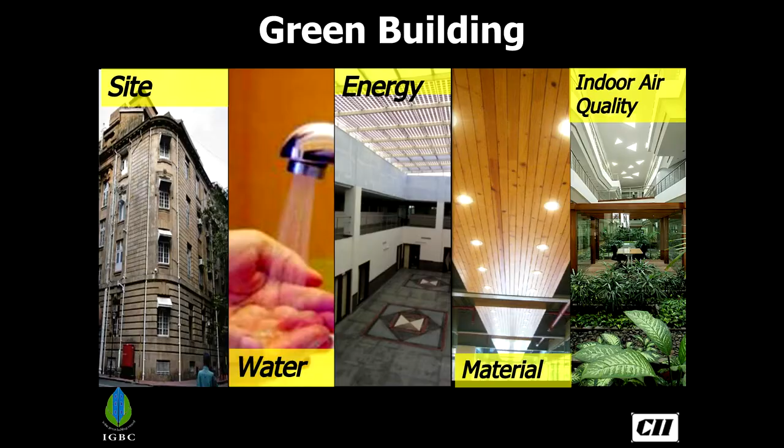So like the 5 fingers in our palm, the green building movement has given architects and every individual sitting in this room and watching this presentation a beautiful opportunity for an integrated design and a holistic approach. Like the 5 fingers in our palm, we have to address the site-related concerns, water, energy, materials, and indoor environmental quality. So the moment we started the journey in 2001, it was very revealing for us.

Our own great-great-grandfathers, thousands and thousands of years ago, discovered the significance of the 5 elements I mentioned a minute ago. However modern we are today, we may be using an iPad and waiting for the iPhone 8 to come. But nevertheless, we in India, before starting any activity, spiritually worship these 5 elements, what we call earth, water, fire, air, and sky. So green buildings are not new to India.

So having set the tone, let us share some of the ideas we have implemented across the country in many projects in India. So to start with, to have a house or an office, we need a site, correct? So how sustainable is our site going to be? The number one green idea here is that green buildings are designed and built around the environment, not against it. For example, the moment you get a site, it may have flora and fauna or a well-grown tree. In a conventional building, many times we don't care about these resources.

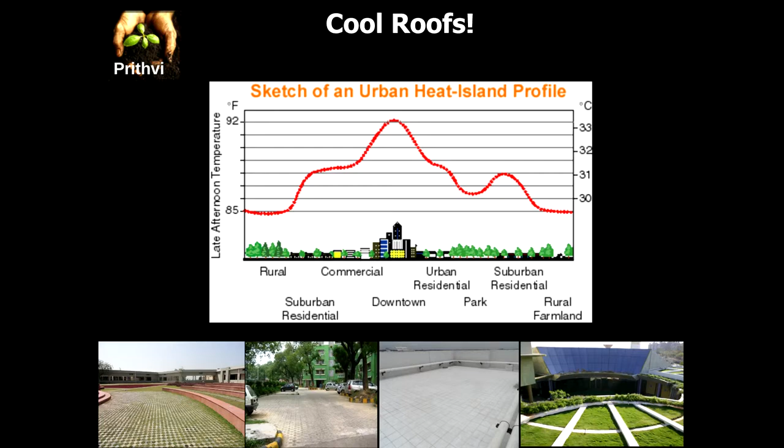Here are all the green ideas. Instead of having conventional concrete or tar around all our colonies or our buildings, you can go in for open grid pavers, which you are able to see on the extreme left hand side of my slide. These open grid pavers have greenery in between them. Or even if you are not able to do that, the roads and the pathways can be covered with beautiful trees, which give a beautiful canopy. Choose the plants which are native to our climatic conditions so that they can shade the buildings and the built environment below. And even the roof, the topmost roof surface is the one which is exposed to the worst ambient conditions outside during the summer months.

So here is a very unique paint, what we call a high albedo paint, which has been painted on the roof surface, so that it doesn't allow the heat to come into my building, so that I need not have any air conditioner at all. In some of the buildings, even the topmost roof has been covered with greenery, so that this mitigates the temperature rise in my microclimate.

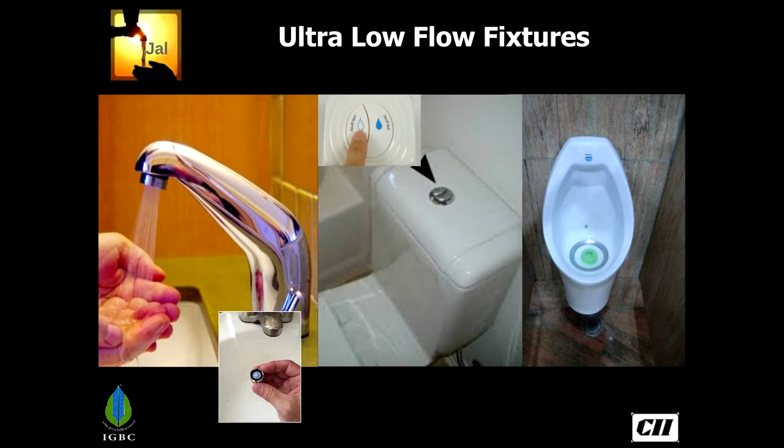Next to the beauty is water-free fixtures. This is in our own center in Hyderabad. We installed it way back in 2002, and still it is working effectively. It doesn't even have a plumbing line, doesn't require water at all to take away the entire urine. So by going for ultra low flow fixtures, we are able to save almost 40 to 50% reduction in water consumption.

Here is a beautiful classical idea. When we said we wanted to save energy in one of the green homes, they preserved the entire rainwater. Instead of letting the rainwater go elsewhere, this green enthusiast stored the rainwater in the sump below the living room. So we were exploring how do we lift the water from the sump below to the surface. Conventionally people would have put a motor, correct? Whereas here is a man, he has put a hand pump.

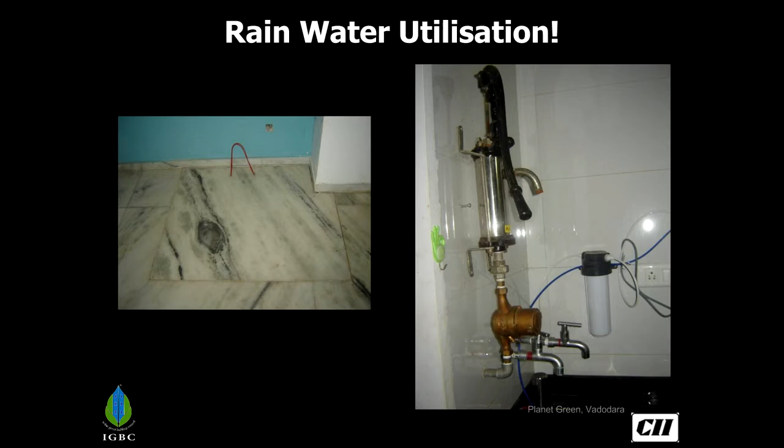So he was going for a gym earlier. Now he doesn't go to the gym. When he was asked why, instead of going and lifting a weight in a gym alongside strangers, here is a guy who comes to the kitchen every single day, does the same weightlifting standing next to his spouse. So the bonding has also improved. The happiness index in the family has gone a notch up. So this is a cool idea, and it is not in one house, many houses are doing this.

Next element to save water is a beautiful idea. If you ask me how much water I have consumed in the hotel room to take a shave and a shower today morning, I don't have an answer. Because since I paid 5,000 rupees as a hotel rent for a night, I switch on the shower and then I become a bathroom singer, correct? I keep on singing, the shower is on and on and on. I don't know how much water I consume for taking a shower in the morning.

Whereas if you ask me how much petrol I have put into my bike or car today morning, I know to the last decimal. Because I see the meter every time when I'm paying 100 rupees. So I ensure that I get 100 rupees worth of petrol or diesel.

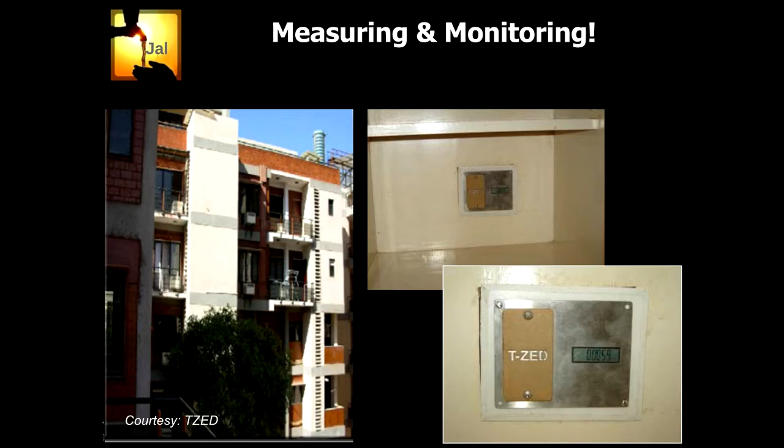So here is another cool idea wherein the water flow meters are located at the entrance of every washroom in this green apartment. Can you believe it? Before I go to take a shower, I see the meter reading is 100. When I come back after doing all the stuff inside the washroom, if it reads 200, how much have I consumed? 100 liters.

So by having a simple measurement, that is what we say in the old Indian proverb: what is being measured can be managed, what is being measured very well can be managed very well. By simply measuring and monitoring, this green apartment is able to reduce water consumption by 50%. On a lighter side, we call this number the bathroom singing index.

When we generate enormous amounts of waste water in our house, office and elsewhere, how do I treat it? The conventional idea is to use a sewage treatment plant which uses enormous amounts of chemicals and power, whereas here is a natural way of treating it. The natural sewage treatment plant, we call it phytoremediation.

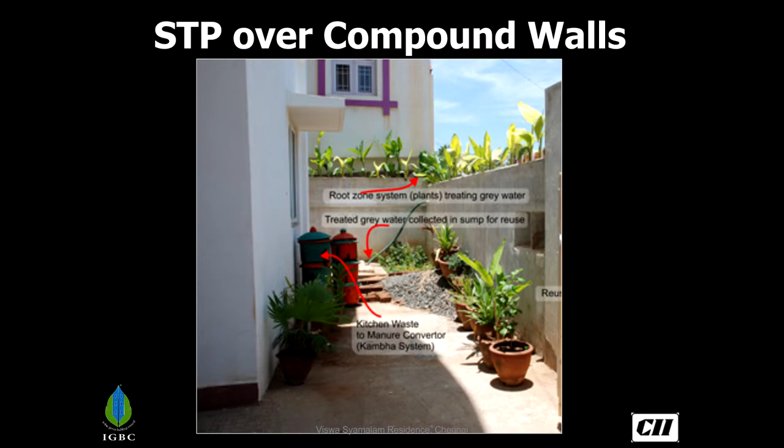Somebody may still say that I don't have that much space. Here is another cool idea. In this house, a green home certified by us, they have used the compound wall as a sewage treatment plant. Can you believe it? Except for the urinal and WC water, the entire water generated in the kitchen sink and washing machines gets treated on the compound wall of this green home.

So that is on the water. Next is on energy. Here you are able to bring in contemporary change in the way in which the buildings and building materials are used. In fact, we would love to say that the entire market is being transformed. You are able to bring in more and more newer products.

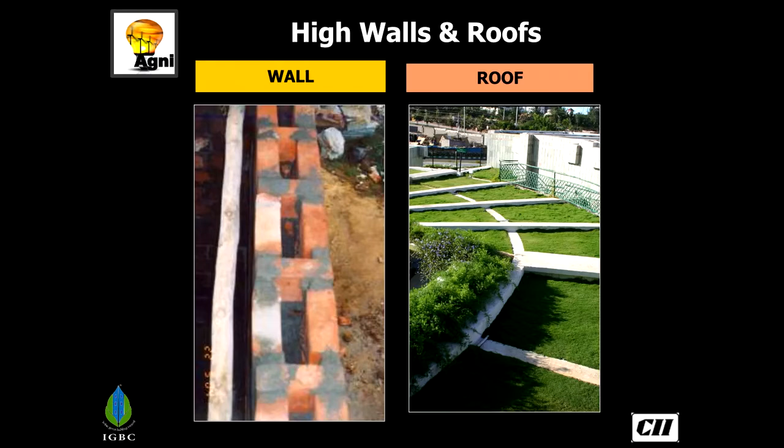For example, here is a beautiful wall made out of two layers with air in between. It is done in a small house in a village. Can you believe it? Based on this success story, many buildings across the country have adopted it. Having a green roof reduces the energy demand substantially. Isn't that another cool idea?

When water, oil, or gas can travel in a pipe, why not sunlight? Then came the sun pipes. This is a small pipe which carries sunlight through a highly reflective medium inside. After multiple reflections, it becomes like a beautiful light. If I hadn't told you, looking at this picture, it looks like an artificial light glowing, correct?

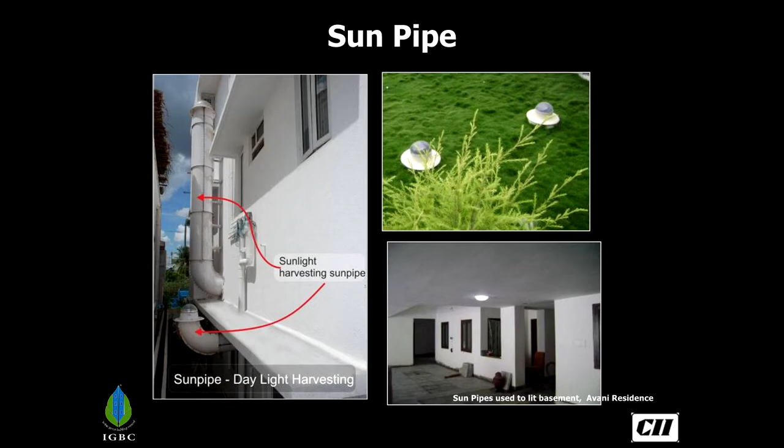But it's not actually an artificial light. It is natural sunlight brought in deep inside my house and my office, so that we can completely avoid artificial light during the daytime.

Here is another case: the hot water generated in this office is used for cooling. Can you believe it? Heating is used for cooling in these office spaces using vapor absorption machines.

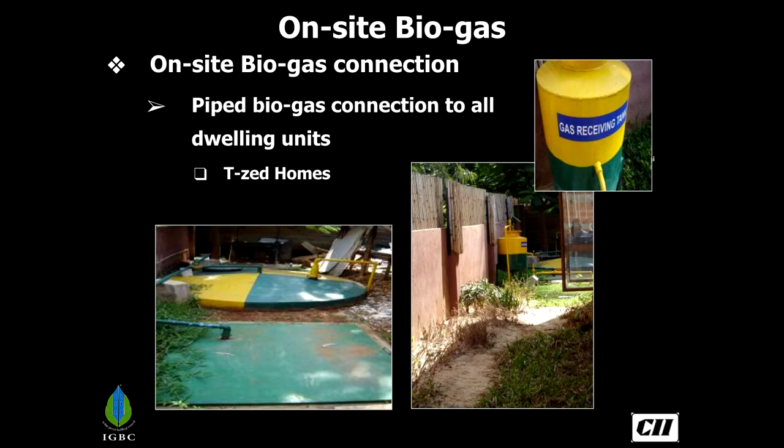Here is another classical example of how we can segregate organic waste in a kitchen in a big residential complex, and then it's able to generate biogas and come back to my own kitchen through a piped connection. Many Indian houses with this facility are able to replace two conventional fossil fuel based cylinders in a year. So what we consider as waste in the kitchen comes back to me as a resource in the form of gas. Next is on materials.

There is nothing called waste in nature. Here is a beautiful green building wherein they have taken old railway sleepers. Earlier, railway sleepers were all made out of teak wood. 150-year-old teak woods are taken from an auction, and then it becomes a building envelope. They didn't stop there.

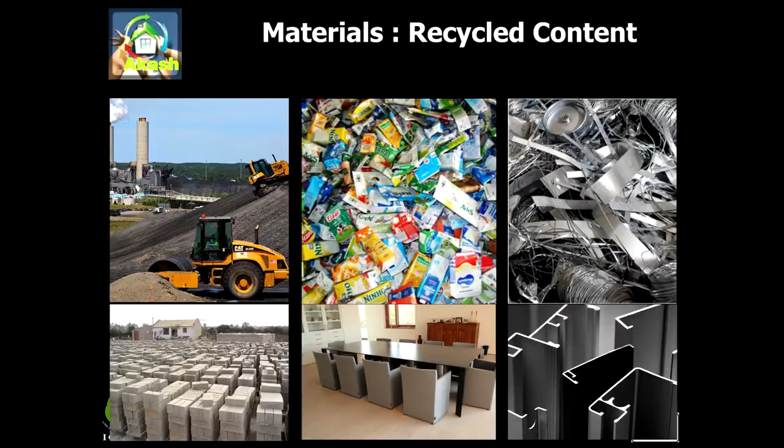The packaging wood you get with machineries, a beautiful pine wood used as packaging material, has been converted into modular furniture and a false ceiling. So every industrial byproduct or waste material, there is somebody else who sees that as a resource. Fly ash from a power plant can be converted into cement or a block. A consumer waste product like a PET bottle or a Tetra Pak can be converted into a tabletop. So there are many options available.

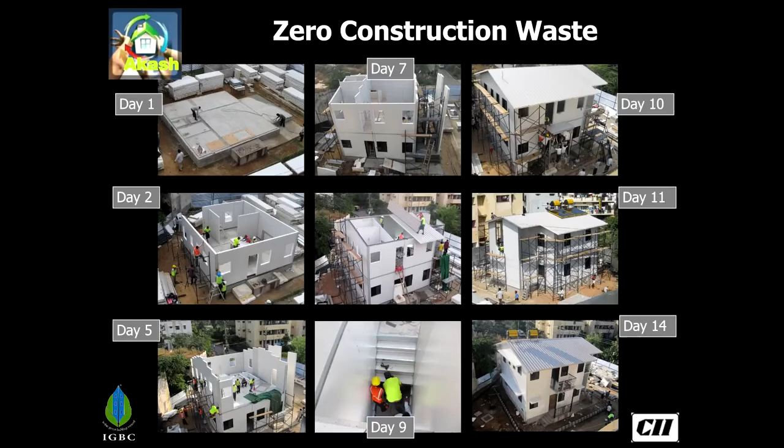This building has not even generated 1 milligram of construction waste. Handling construction waste across the world is a very, very tough, challenging job. Here is a case wherein they did not even generate 1 milligram of waste while constructing this house, and they did it in 14 days by using a prefabricated assembly. It's all assembled — the entire house is assembled at the site.

The last one is on indoor environmental quality. Many of us would have experienced this: you walk into a cinema hall to watch a movie.

After the end of the movie, you pick up some kind of a headache or uneasiness, correct? Many a times we blame the quality of the movie, correct? You have chosen one of the lousiest movies ever produced on earth - may not be the reason. There won't be any fresh air. If there is no fresh air available in that hall, that could be one of the reasons.

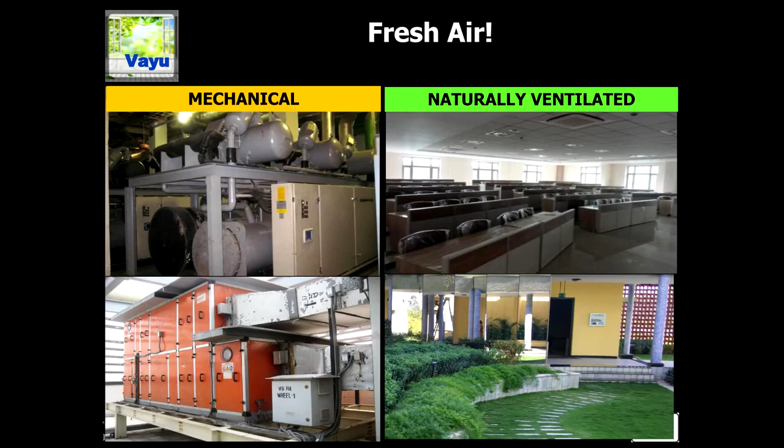So green buildings encourage bringing in more and more fresh air. The green buildings are not only encouraging energy-friendly techniques, environment-friendly techniques, it also encourages people-friendly techniques like all the finishing products - your paint, adhesives, the furnitures, the plywoods - all of them should go green. There are options available.

And then daylight and views is being encouraged. So when you walk into an office or a home, it should be completely flooded with daylight.

Ironically, there was a medical journal article which we read very recently - some of the Indians are having a deficiency in vitamin D. Can you believe it? What is the source for vitamin D? Sunlight. Sunlight is available in abundance in India 360 days in a year. But still, some of us are not exposing our skin to the daylight.

So the green buildings encourage a beautiful design which brings in enormous amount of light as well as provides connectivity to the external world. And the green buildings also encourage us moving from doing less of bad to more of good. So when you do more of these green ideas, your energy demand comes down drastically low.

Having brought down the energy demand as low as possible, the entire energy demand is met by the solar energies located in these buildings. We call these buildings net zero energy buildings. In my opinion, I call these buildings no more as a building actually - we call them a power plant, because they produce more power than what they require and export the surplus power available.

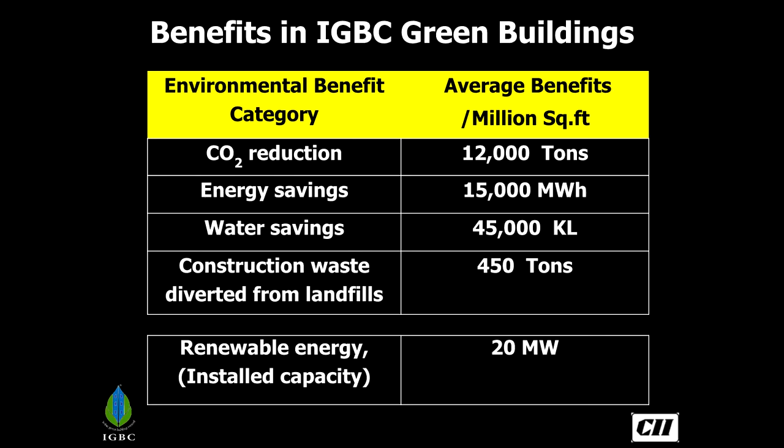So by going green and adopting these measures, buildings are able to save substantial amount of energy, water, as well as diverting construction waste from reaching the landfill. So what it began as one building from our own center in year 2001 - IGBC's headquarters with only 20,000 square feet - it has become a big movement.

India today has 4.5 billion square feet of space going green with us and stands number 2 in the whole world. And this belongs to the entire stakeholders in the country.

So the Indian stakeholder construction industry has showcased or demonstrated that tradition and technology can coexist. When you walk into this building, our own building, or any other green building certified by us in the country, we go through the central courtyard.

We are plunged into the sunlight given through the beautiful glasses. We breathe the fresh air. When we do all of this, we feel that we walk into history actually. So this is what we want each one of you present here, or listening to the presentation, to embrace.

Embrace the green concepts and involve in the green building movement and inspire millions of people. And it also gives us a sense of contribution towards our society and Mother Earth.

The good news here is 70% of India is yet to be built. So this gives a great opportunity for every single individual in this hall and away from this hall, irrespective of your own profession. So all of us can contribute in making the planet a much better place to live in.